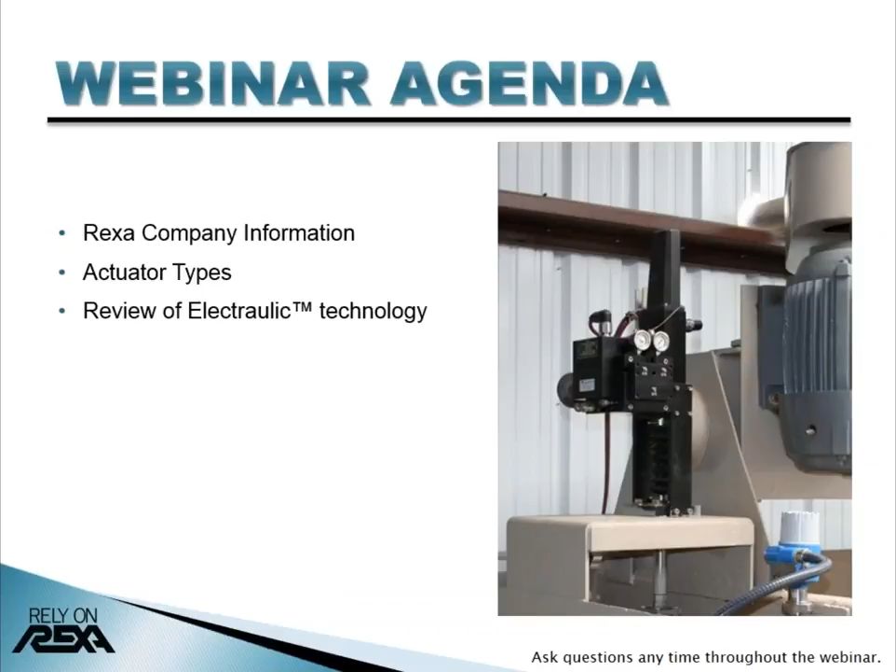As far as the agenda, we're going to talk about Rexa company information to gain a better understanding of Rexa technology. We'll look at the different types of actuation to distinguish from what we do. It was from the need to combine the benefits of each type of actuation technology that Rexa originates and eventually took shape. We'll review the inner workings of the Rexa actuator and what makes it the most unique technology in the market, and we'll look at a focus application, which would be flotation cell dart valve requirements. And we'll look at a pulp level case study of a mine in Arizona, and we'll summarize the advantages and takeaways.

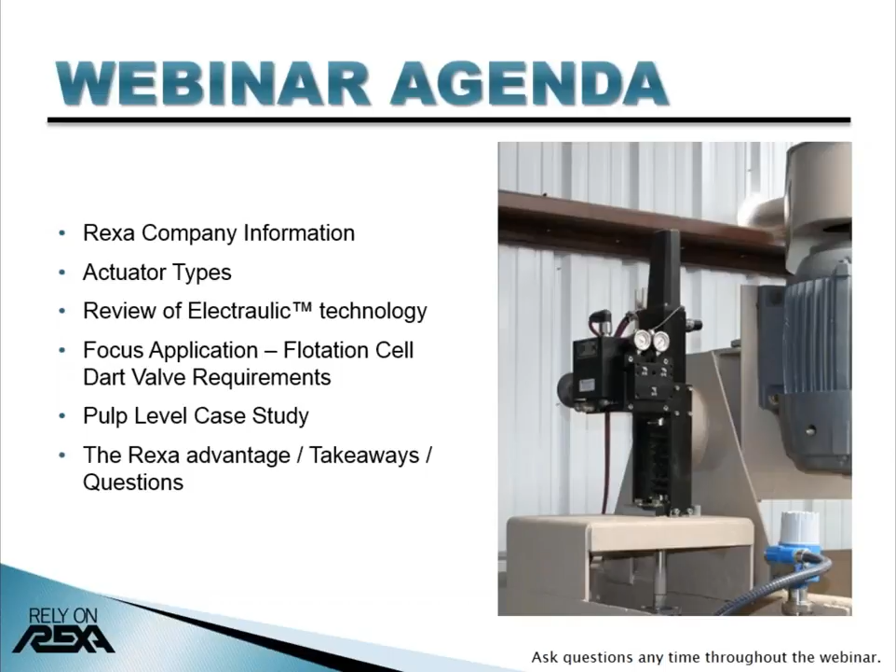The unique actuator patent and concept and company began as a small startup in the early 80s. After trial and error, the first generation model was installed in a few industries in 1993. In 2008, the X2 generation contained key features that built upon the core technology to make it rugged and reliable. Rexa's rapid and consistent growth continues with over 36,000 actuators and drive units sold worldwide. With headquarters near Boston, Massachusetts, and a service and distribution center in Houston, Rexa continues to expand and grow, focusing on key industries such as mining, metals, power, and oil and gas.

Rexa's global install base has thousands of actuators in the mining industry at major miners around the world. At the Morenci copper mine in Arizona alone, there are over 600 Rexa actuators installed.

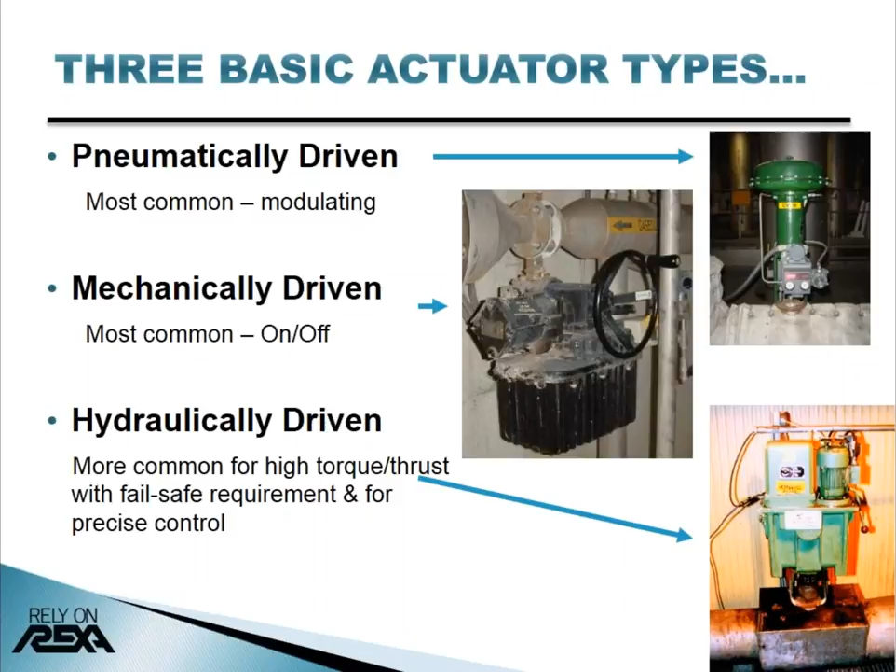There are three types of actuator technologies: pneumatically driven, mechanically driven, and hydraulically driven. Each uses a different method to develop forces and create motion, all with advantages and disadvantages.

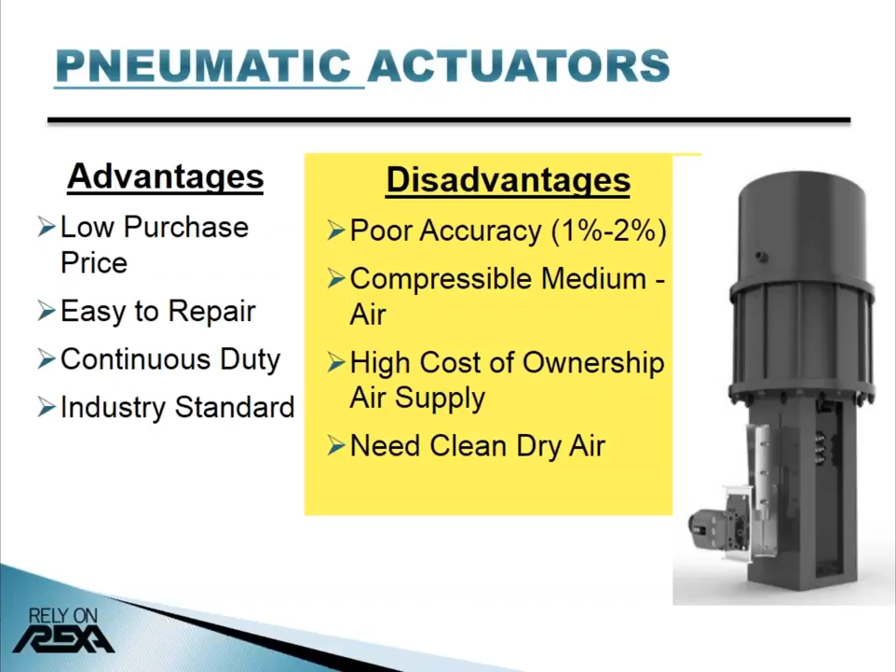First, pneumatic actuators are most common on control valves on new equipment and projects. Their advantages include low purchase price and fast stroking speeds. However, there are limitations with using pneumatics. Because air is a compressible medium, it needs to build up in order to create motion. The results are losses in resolution, overshoot or undershoot, and increased dead time. Even with the use of a smart positioner, the compressibility of air is an inherent problem to achieve rapid and accurate positioning. Operating costs are expensive when you include air compressor energy, dust filters, and water separators. In cold weather, moisture in the air lines may freeze and make the pneumatic actuator non-functional.

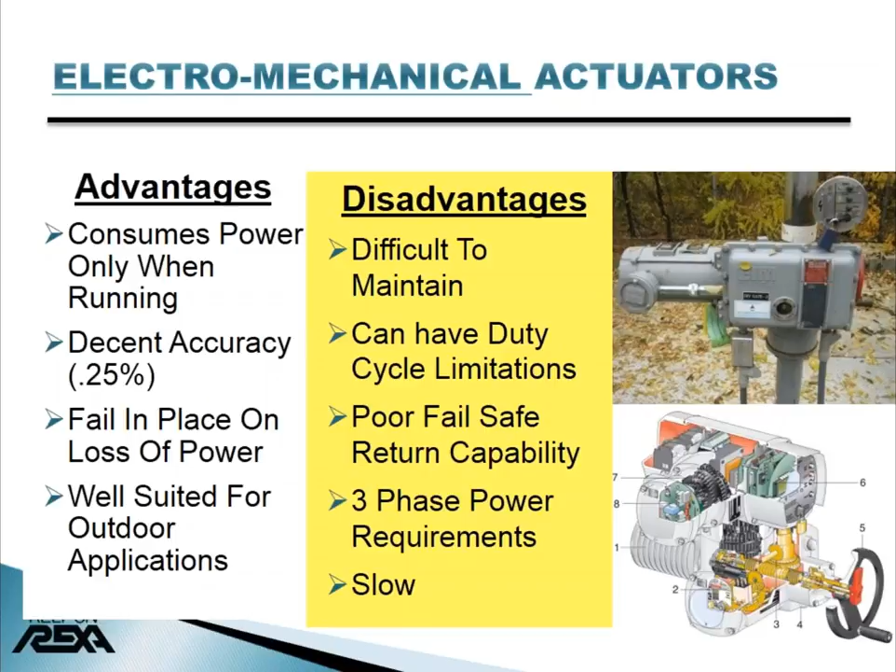Next is electromechanical actuation, most commonly found in on-off type service, which provides tighter control and better frequency response than pneumatic actuators. They're also good in outdoor service. However, most electromechanical actuators have a limited duty cycle, limited force or torque output, and very few fail-safe options available.

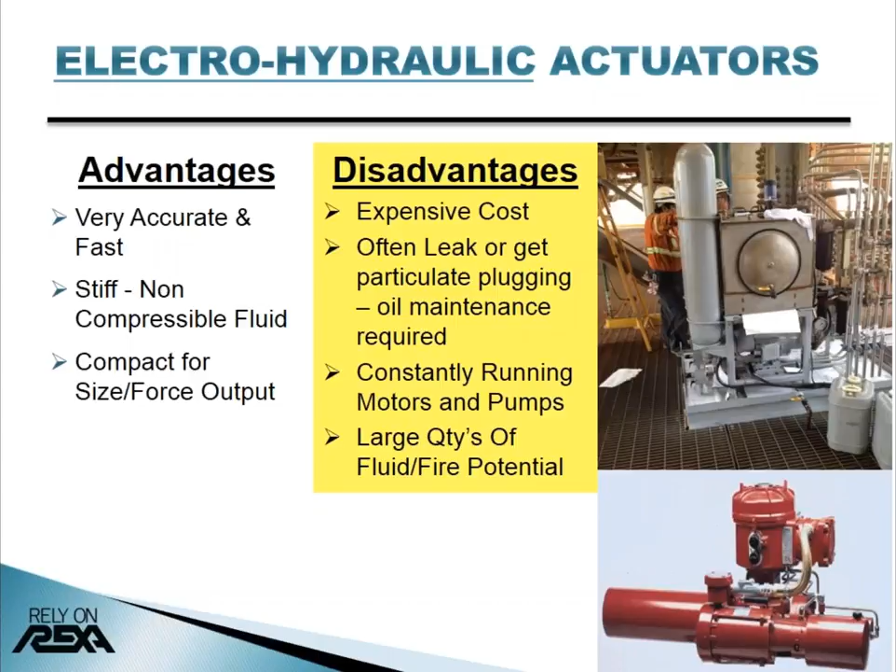The use of electrohydraulic actuators is common for control valves requiring higher thrust and precision. These systems provide fast-acting response, accurate positioning with a high duty cycle. They're also good for high torque applications. These benefits, though, come at a cost. High capital cost, electrical consumption, or oil maintenance costs add up to offset the positioning benefits.

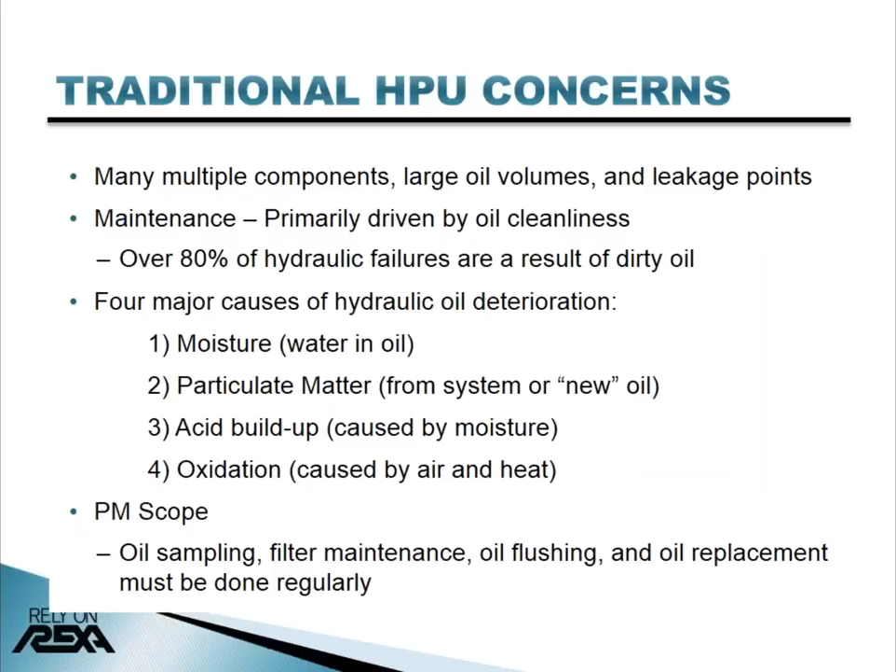HPU units typically have large oil volumes and need routine oil maintenance. Since the hydraulic systems are open-looped, the oil in the reservoir has contact with the environment. Over 80% of hydraulic actuator fails are the result of contaminated oil. Water, oxygen in air, and particulates are examples of foreign matter that degrade the oil quality over time. Many issues with the HPU system can often originate from the breakdown of the hydraulic fluid. Components like servo valves are very sensitive to changes in the hydraulic fluid quality. A complex preventative maintenance schedule is needed to maintain the hydraulic fluid's optimal properties. Oil sampling, filter maintenance, oil flushing, and oil replacement must be done regularly to reduce unscheduled failures.

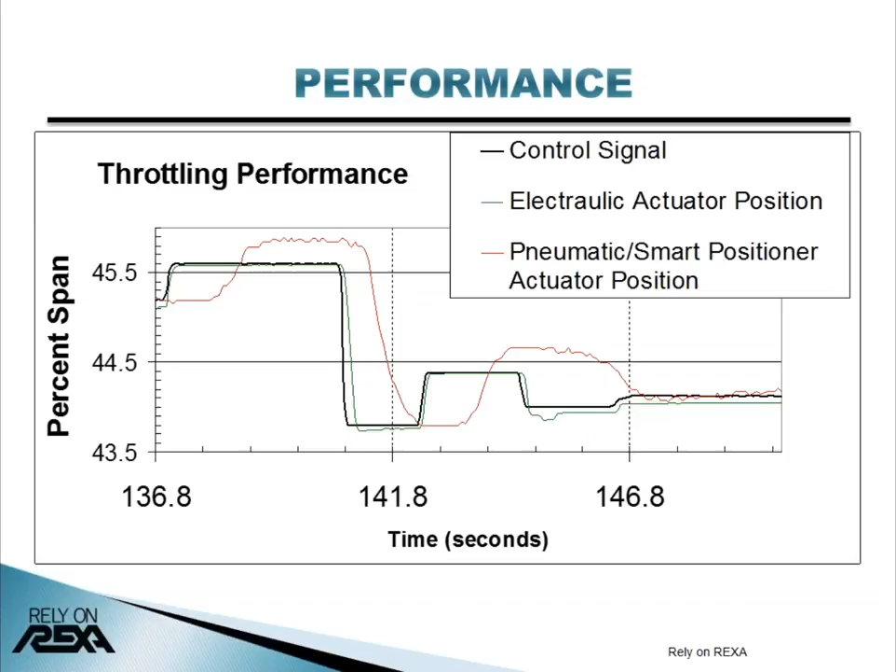With a dead band of 0.1%, which leads to a resolution of 0.1% and a linearity capability of 0.05%, the Rexa X-Pack is the only actuator product line truly capable of matching the potential of modern control systems.

I like to use analogies sometimes. They communicate the message, or sometimes get lost. The control valve is the final control element in many processes, such as making copper or gold. Often the limitation of installed actuators is that they do not take advantage of today's advanced DCS systems.

One analogy I like to use is the need in Formula One racing to push technology and performance between the powertrain, which includes the engine and transmission, and the racing tire design and compound formulation. As an example, in 2005, at the F1 race in Indianapolis, some tires were failing during the qualifying laps on turn 13. So the tire manufacturer suggested having the race car slow down for that turn to keep the driver safe, but this reduced lap times.

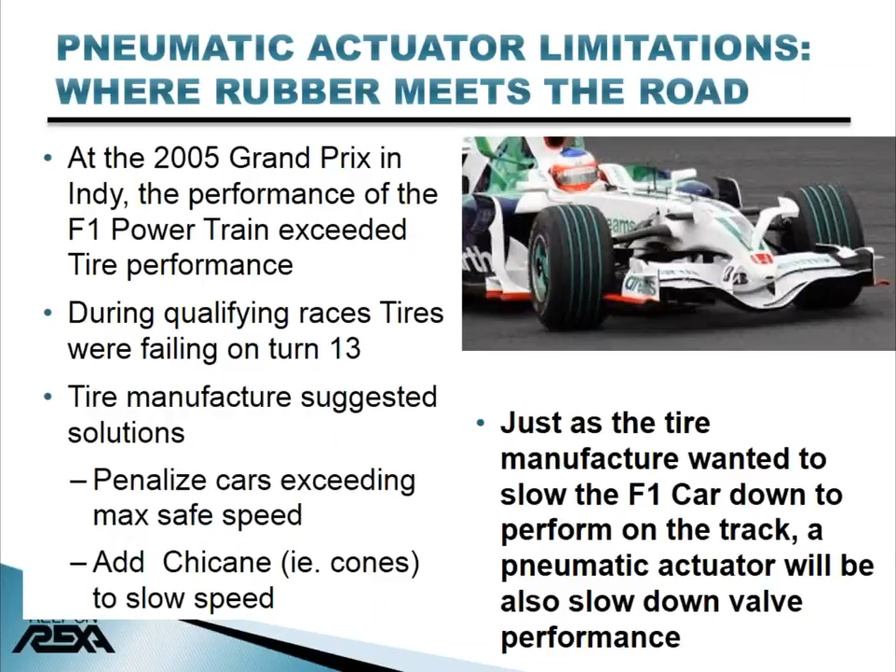For a valve actuator assembly controlling liquid flow, we do not need to be limited or slowed down by a pneumatic actuator. With Rexa, the electrohydraulic performance enables the power of the DCS to be realized.

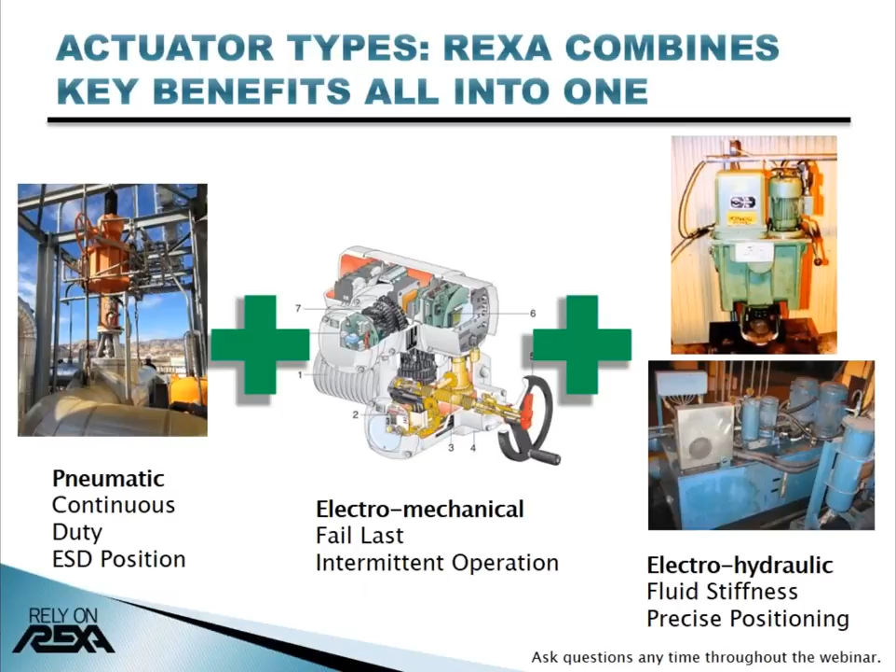Rexa combines the benefits and capabilities of each of the actuator technologies into one: simplicity, fail-last position and high duty cycle of pneumatics; intermittent operation of electromechanical; and positioning accuracy and fast actuation speeds of hydraulics.

Let's talk about some of the benefits of the hydraulic actuator of Rexa. To begin with, it's a very unique design, unlike anything on the market today. The true closed-loop hydraulic system is hermetically sealed with oil volumes approximately 95% less than those found in a standard HPU. Smaller Rexa units have as little as 500 milliliters of oil, which is about one can of Coca-Cola soda.

There are no filters or oil changes required, making it maintenance friendly. All models can operate at 100% duty cycle if needed through the use of a brushless DC motor or servo motor. These units are high precision and repeatable to 0.1% span. Our modular design allows very high thrust and torque output with a high-speed fail-safe option.

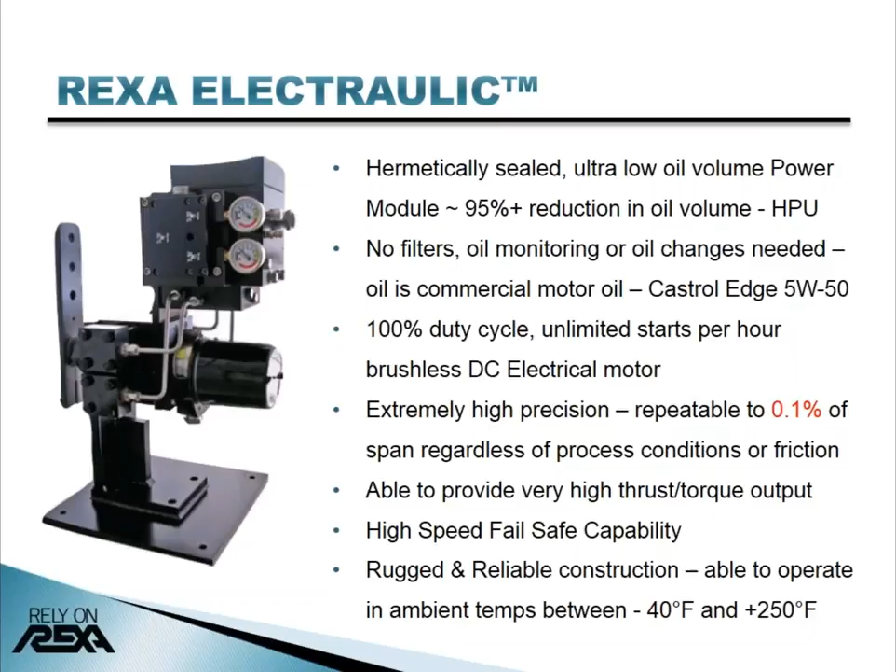Operating temperature range is -40 to 250 Fahrenheit without performance degradation. Having Rexa actuators installed at major steel mines in the world, Rexa actuators are unmatched when it comes to being rugged and reliable.

The Electraulic technology consists of two primary components: the mechanical subassembly and the electrical subassembly. The mechanical portion is attached to the driven device, which in this case would be a dart valve. It contains a motor, pump, flow match valve assembly, cylinder, and feedback housing.

The electrical subassembly is basically the positioner of the actuator. This is where the main power supply and control signal are routed, and the origination of 4 to 20 milliamp position feedback for connection to the DCS or other control system. Digital communications such as HART or Foundation Fieldbus are also available.

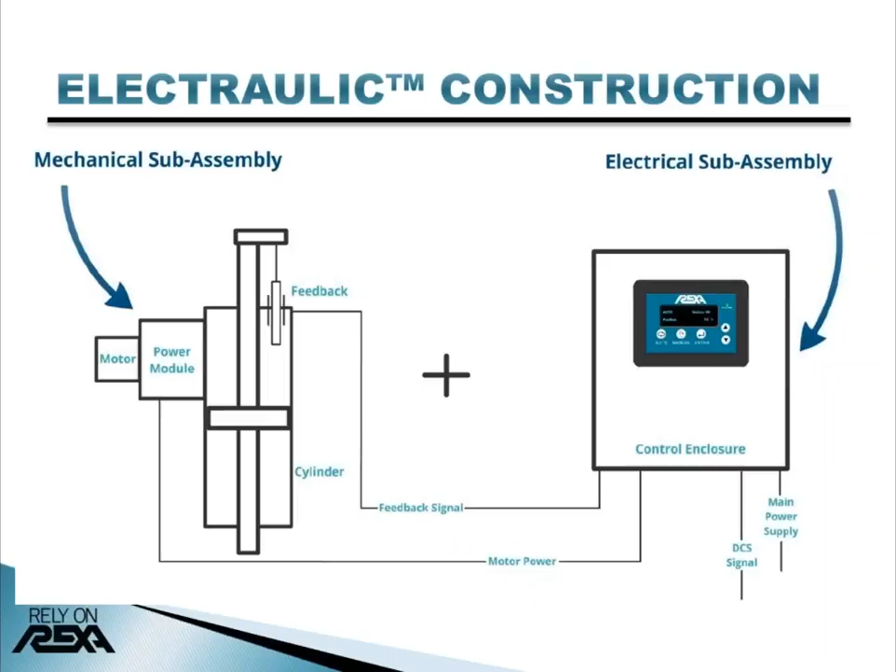We separate the electric and mechanical sub-assemblies for ease of access and operation. There are many severe applications, for example close to furnaces, where onboard electronics simply would not survive. The control box can be mounted in a convenient location next to the valve, or up to 700 feet away.

Let's next take a look at the hydraulic circuit that Rexa has. This is a real area of differentiation of our technology in comparison to HPU-based electrohydraulic systems. The centerpiece of the electrohydraulic circuit is our bidirectional gear pump, which is coupled to the DC brushless motor.

The gear pump works in conjunction with the flow match valves, which are designated FMV1 and FMV2 on the schematic. It is important to note, from a size perspective, the flow match valve and gear pump can be held in the palm of your hand.

During operation, when the actuator is at a desired position, the spring-loaded ball checks are locked in place to prevent the flow of oil through the flow match valves. The cylinder is hydraulically locked in place, so forces acting on the valve will not result in valve movement, which is observed in pneumatic actuators.

But when there is a signal change, the motor activates, turning the bidirectional gear pump, which instantaneously builds pressure, allowing the ball checks to open. The oil is then transferred through the flow match valve, one side of the cylinder to the other. Once the actuator has reached its desired set point, the motor stops, the ball checks are seated, stopping the flow of oil through the system.

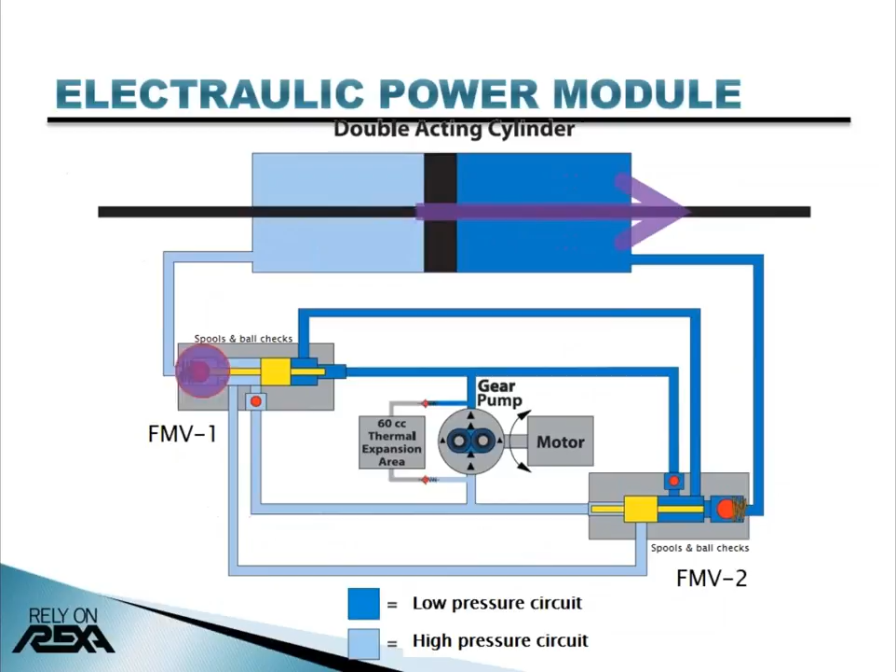The cylinders we use are dual rod or rack and pinion, so the oil volume exiting one side of the cylinder is equal to the volume entering the other side. The design eliminates both the requirement for an external reservoir and the need for continuously circulating oil through the system. This also leads to another significant benefit of our technology: greatly reduced oil volumes.

A thin film potentiometer is directly coupled to the cylinder shaft. The cylinder seals are rated for 2 million full strokes or 20 million dither cycles.

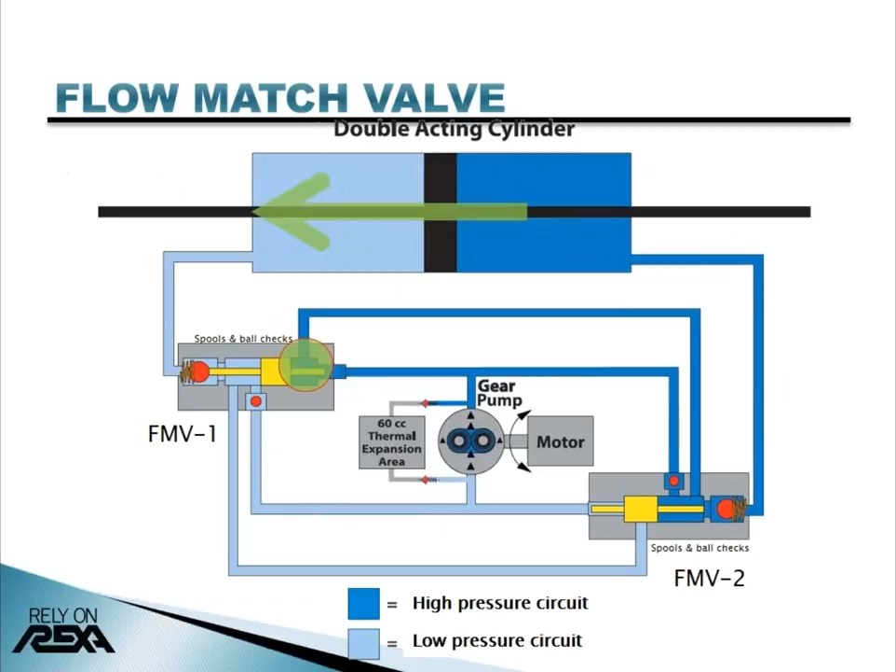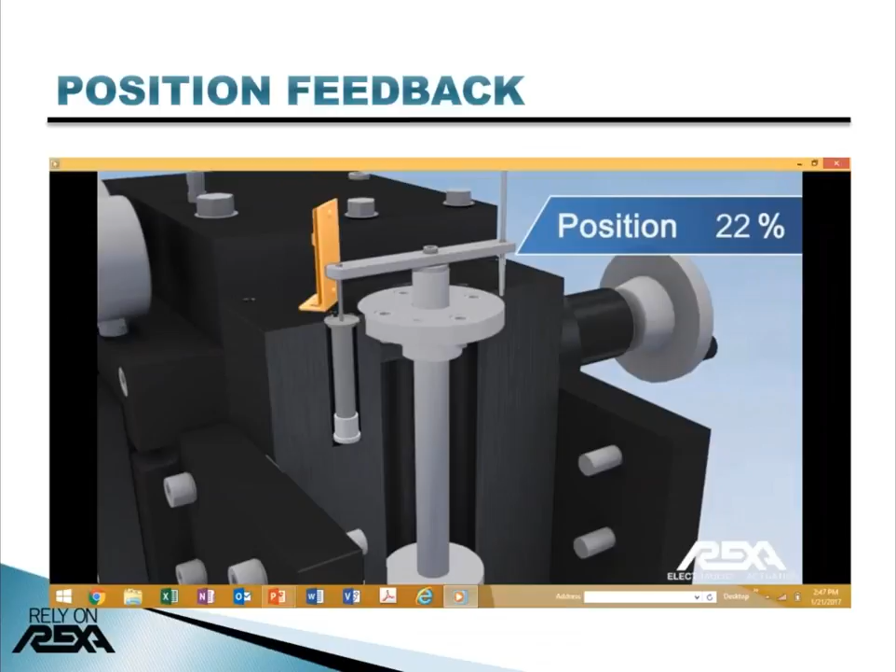Let's look now at how Rexa actuators can be used in flotation cells. Froth flotation is a process for separating minerals from gangue by taking advantage of differences in their hydrophobicity. This difference between valuable minerals and waste gangue is increased through the use of surfactants and wetting agents. Selective separation of minerals makes processing mixed ores economically feasible.

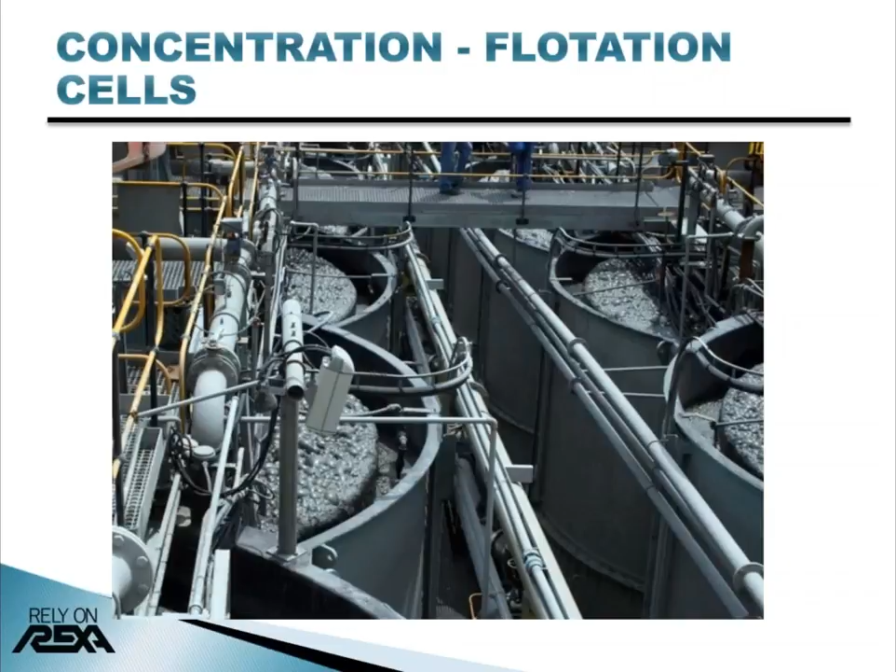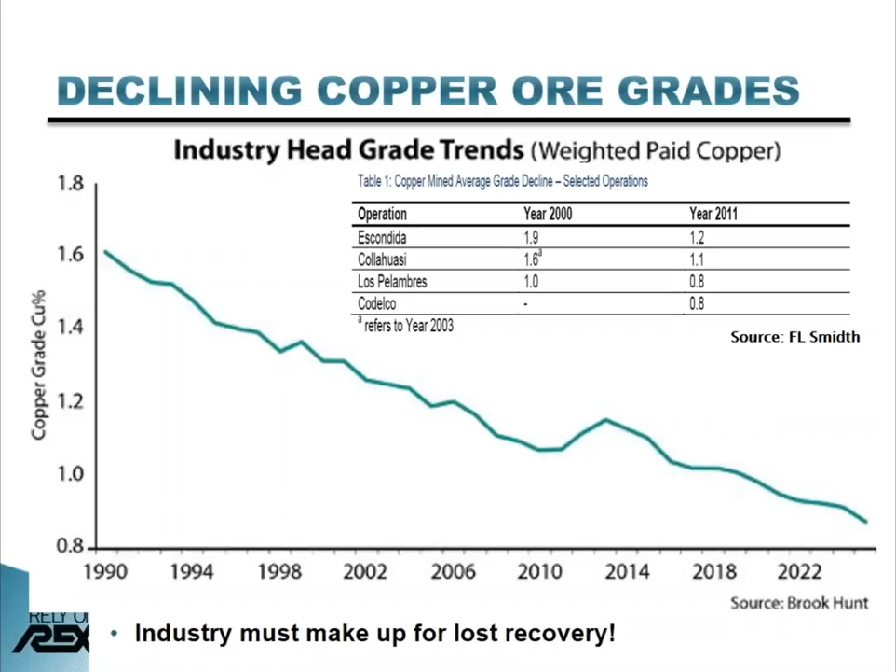The flotation process is used for the separation of a large range of sulfides prior to further refinement. Phosphates and coal are also purified by flotation technology. Copper, gold, moly, and platinum are examples of minerals often processed using flotation.

Two modulating valve applications are dart valve positioning and airflow control. The focus of this webinar will be dart valve positioning to maintain pulp level set point. Achieving a level pulp will allow the froth layer to be more consistent.

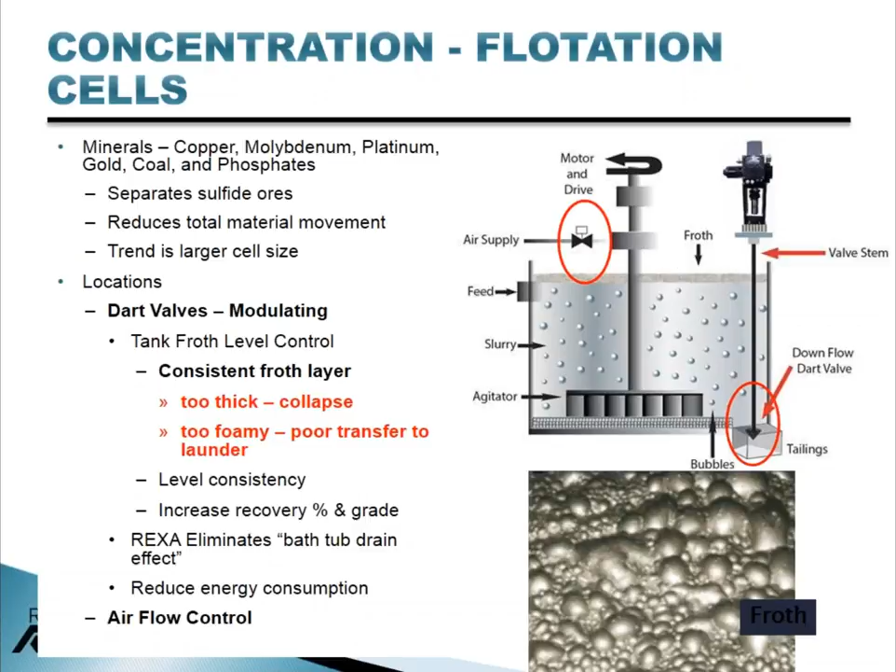To achieve a stable froth level, the actuator should be able to perform flawlessly in the following areas: actuate at a high duty cycle without stalling, be reliable without causing unscheduled downtime, be able to position rapidly and accurately to control signal changes, and depending on how the plant operates, be able to fail in place or fail closed.

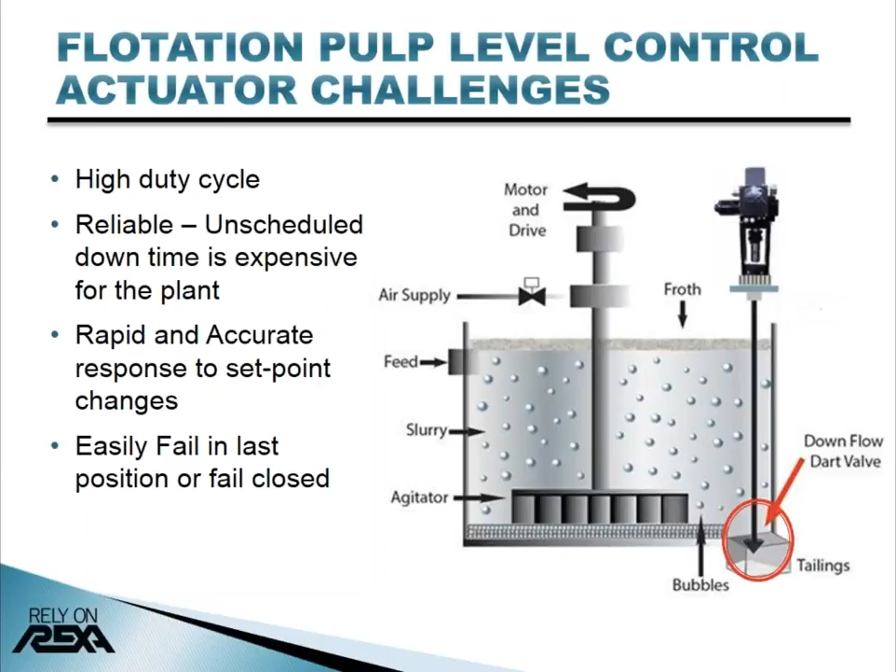When the dart valve position is near the valve seat, the pulp velocity increases, creating a lower pressure. This force will pull the dart valve toward the valve seat. As cell volumes increase to as big as 600 cubic meters, higher thrust forces and fast stroke speeds are needed.

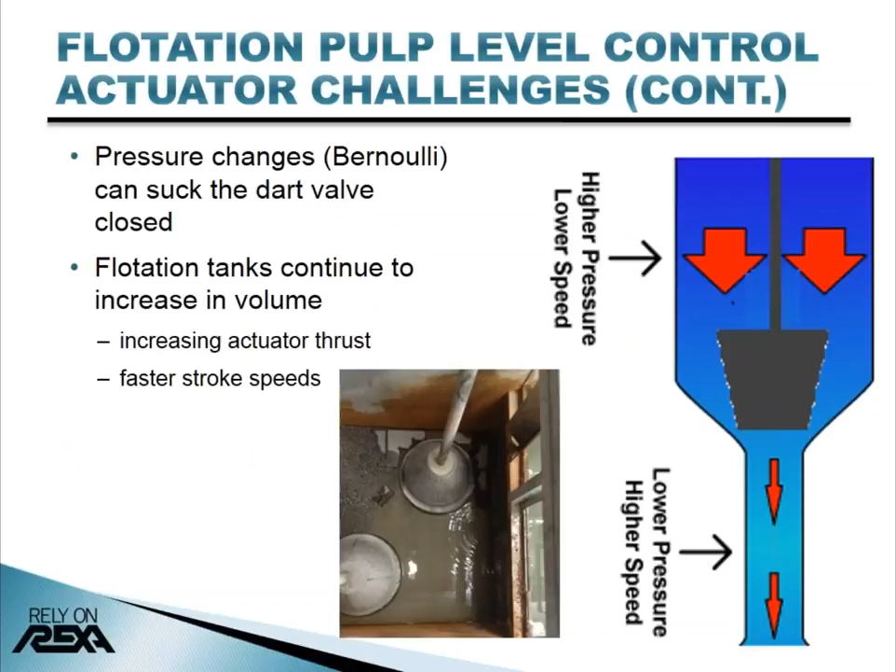Grade recovery curves are useful tools in weighing the trade-off of producing a high grade of concentrate while maintaining as high a recovery rate as possible — two important aspects of froth flotation. These curves are developed empirically based on the individual froth flotation process at a particular plant. The curves are shifted in the positive-right and positive-upward direction, and by doing this, the performance of the froth flotation process is regarded as improving.

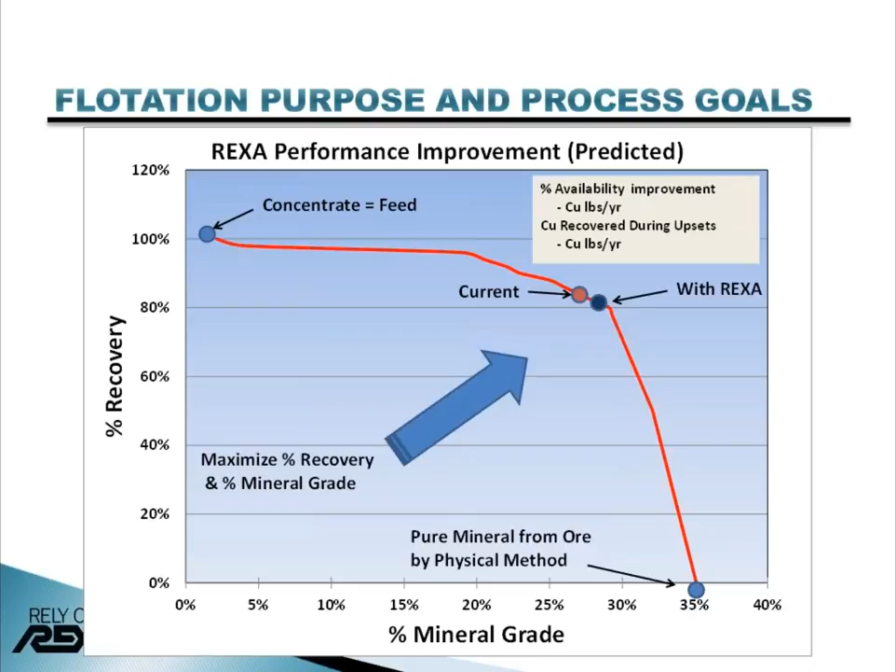The theoretical limits are percent recovery and percent mineral grade. With 100% recovery, the ore is recovered with little benefit of concentrating the ore — the analogy is throwing the baby out with the bathwater. The other limit is to achieve high mineral grade with infinite time to achieve the separation, but the real world is not a test lab with infinite time.

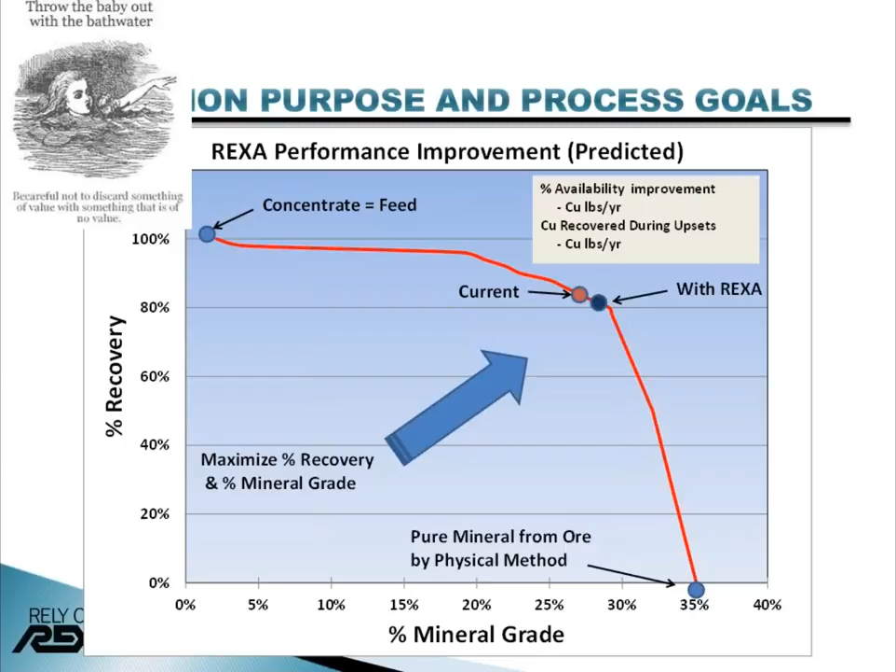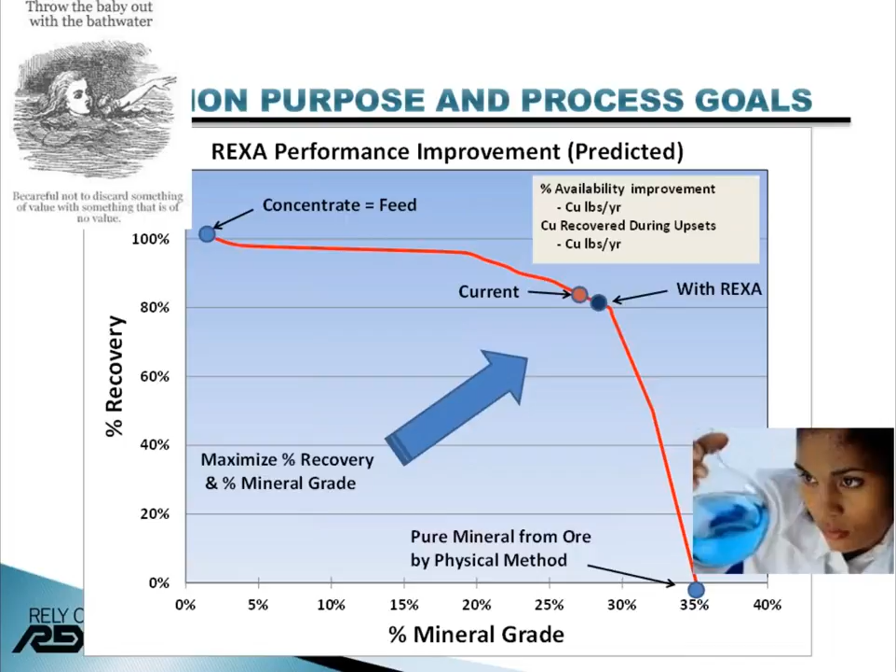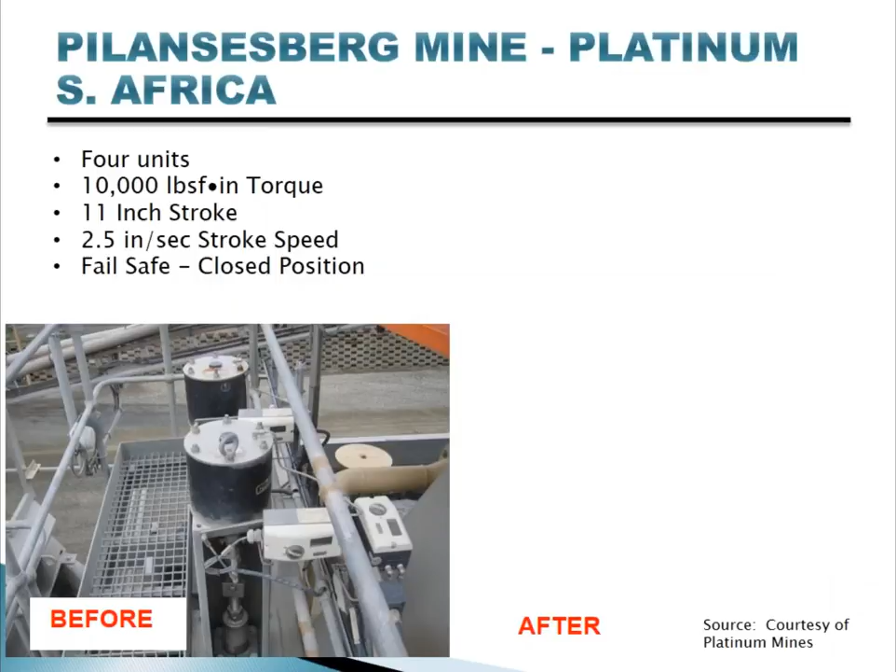At the Pilansesberg mine in South Africa, Rexa actuators successfully replaced pneumatic actuators. We also have an accumulator skid to provide fail-safe. Accumulator fail-closed positioning replaces the spring with a reservoir and piston-type accumulator placed in parallel with the cylinder. This eliminates the need to oversize the cylinder to make up for the force required to compress the spring. The accumulator is isolated from the main hydraulic circuit during normal operation.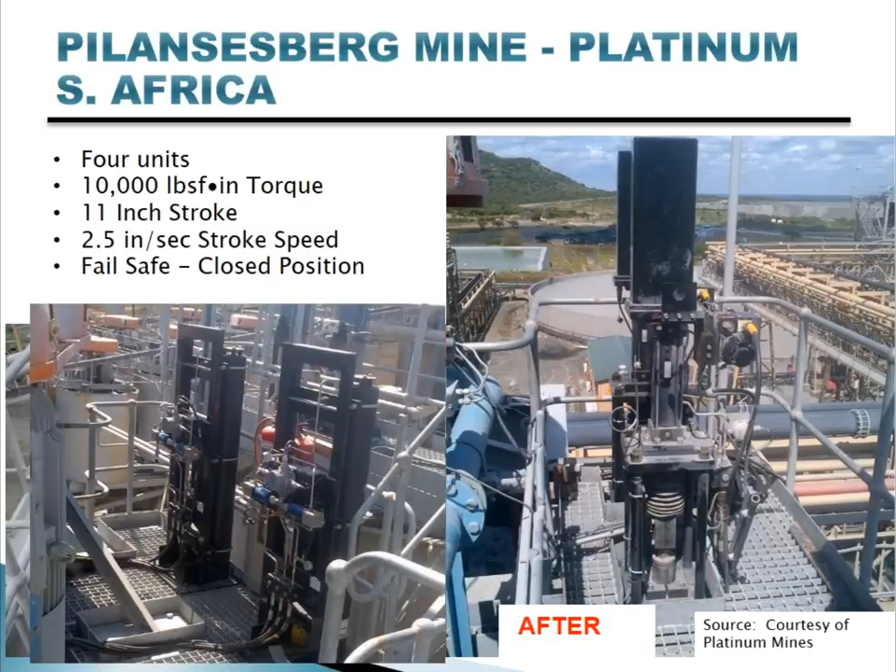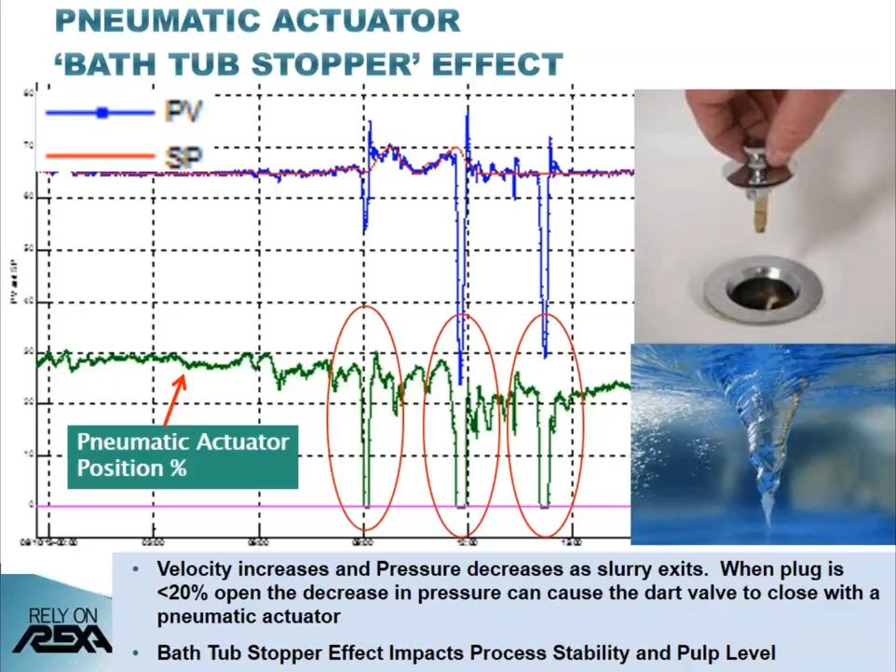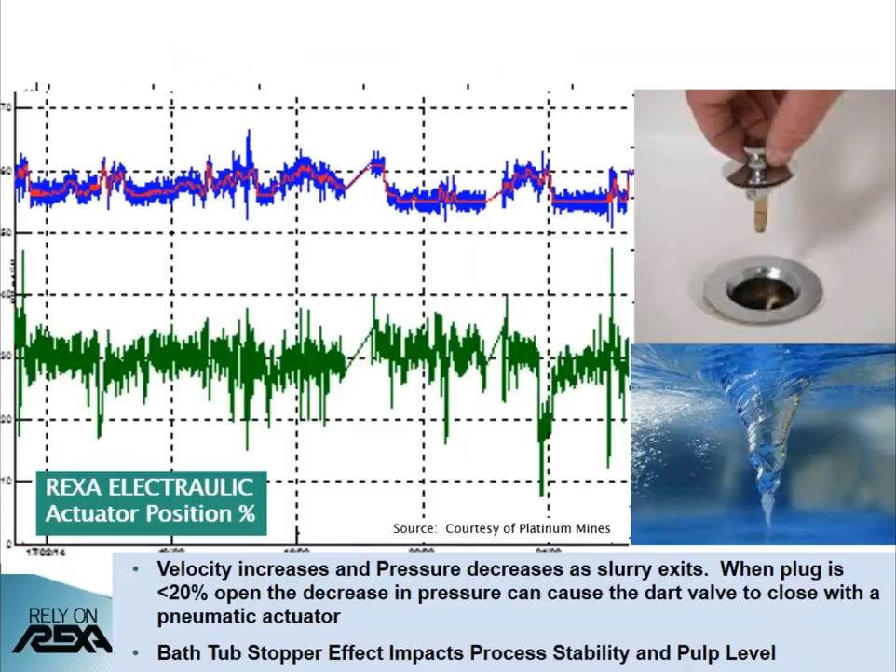After retrofitting with Rexa actuators, because of the stiffness of hydraulics, the valve position never closes. In this situation, the actuator control strategy for the 2 actuators was split range. The process variable variation, which was the flow rate, was reduced with Rexa by 43%.

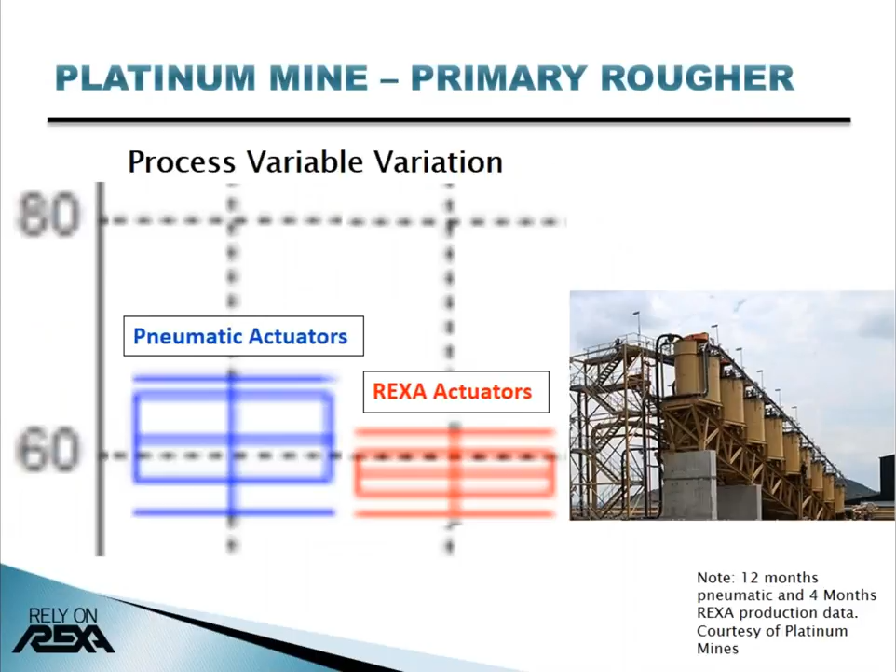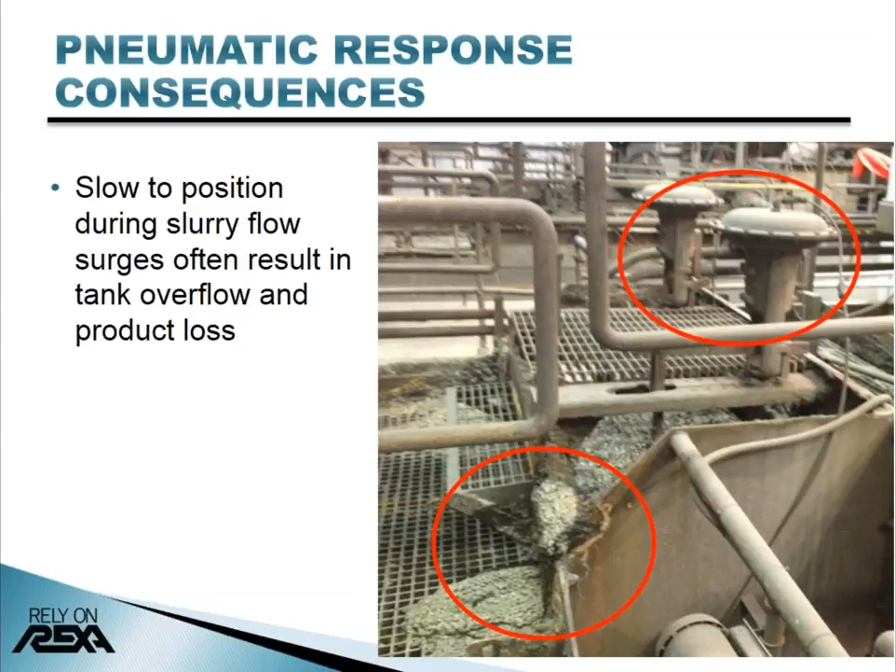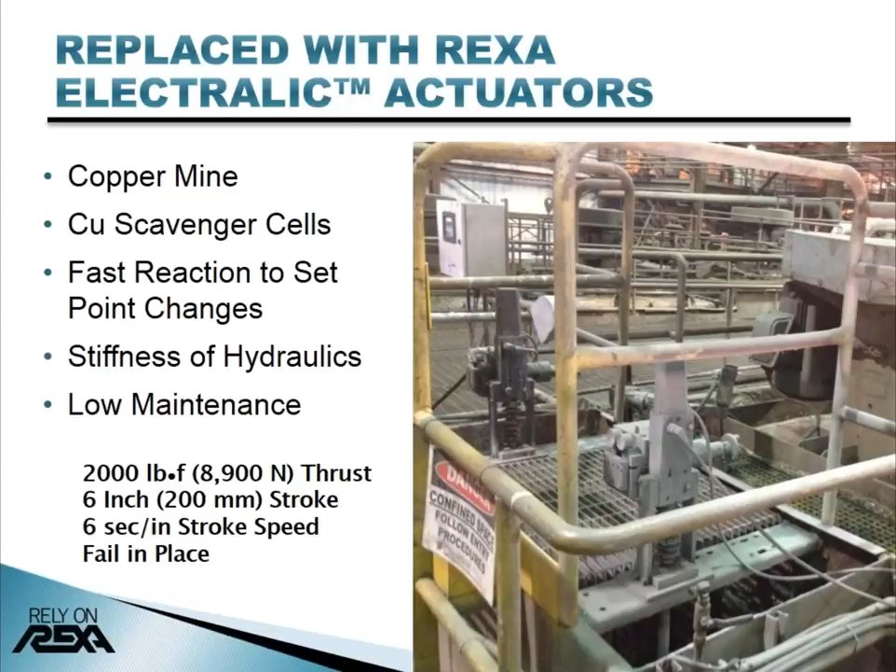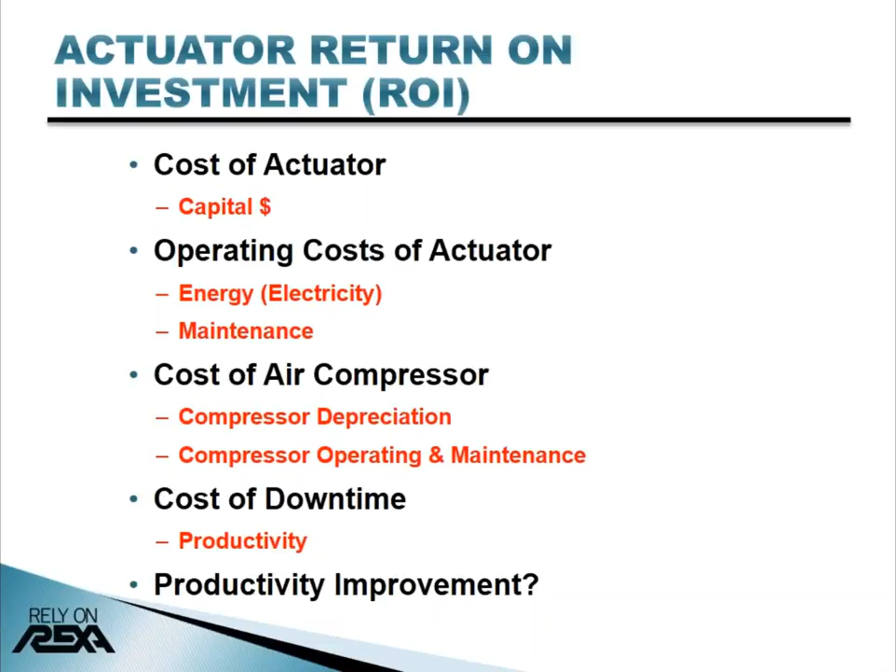In this case study, the rougher flotation step is followed by the scavenger flotation step, which is applied to the rougher tailings. The objective is to recover any of the copper mineral that was not recovered during the roughing stage. Copper contained in the pulp leaving at the bottom of the scavenger cell goes to tailings and is not recovered in the current process.

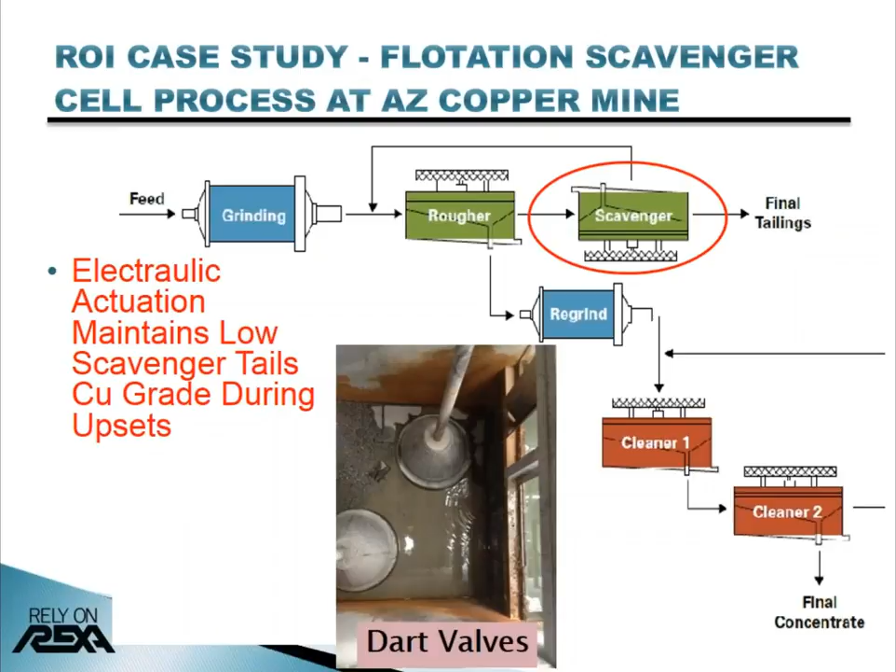When the end user south of Tucson, Arizona compared the performance of Rexa versus pneumatic actuators, the results were clear. During steady state operation, the copper grade going to the tailings was about 0.15% copper for both types of actuation. But during slurry fluctuations, the Rexa continued to maintain 0.15% copper.

The pneumatic actuators were about 25% higher in copper going to the tailings. The cost to the mine, with about 43 minutes of disruption time per day, is estimated to be about 33,000 pounds of copper that is lost to the tailings due to the pressure fluctuations and the pneumatic actuator not being able to control it.

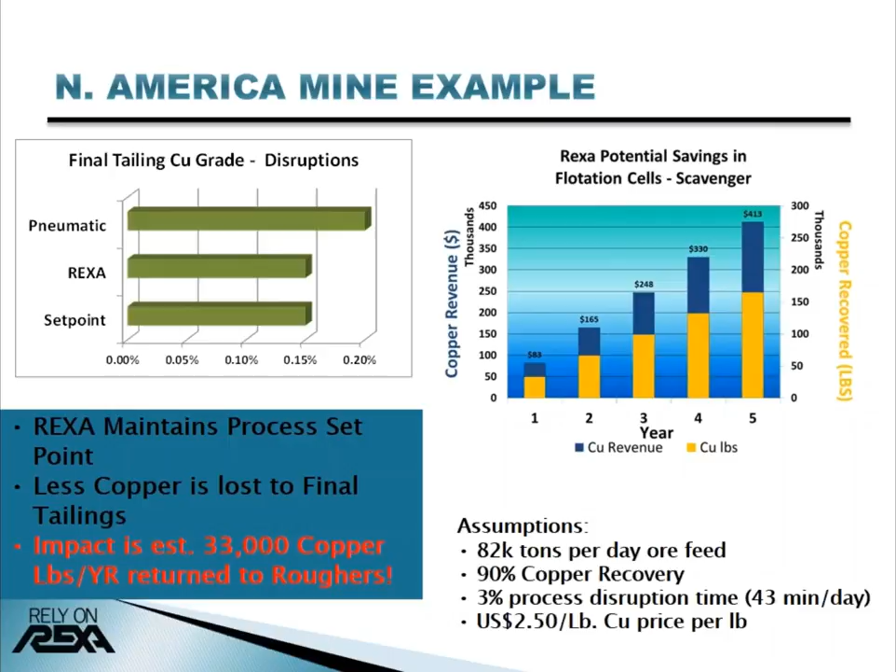So let's look at operating costs. A single Rexa actuator will operate at under $500 per year versus $7,000 per year for pneumatics. I used the energy consumption costs from the Department of Energy website for my assumptions. The electricity is a significant contributor, as well as compressor maintenance.

Replacement dust filters and airline cleaning also contribute to the maintenance component. The Rexa electrical consumption is very low: 70 watts for the electrical cabinet, 120 watts for an intermittent heater, and 800 watts for the motor operated intermittently.

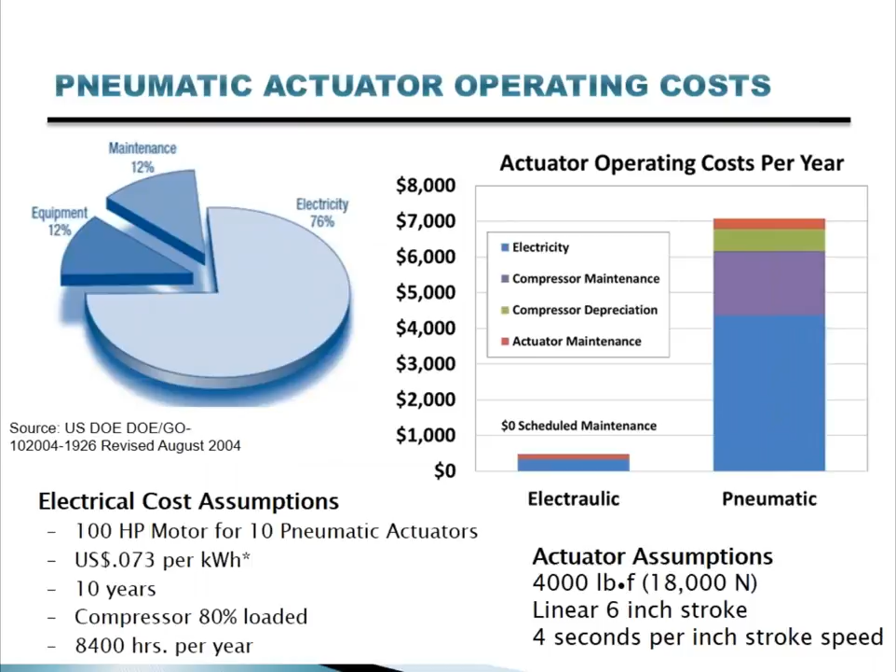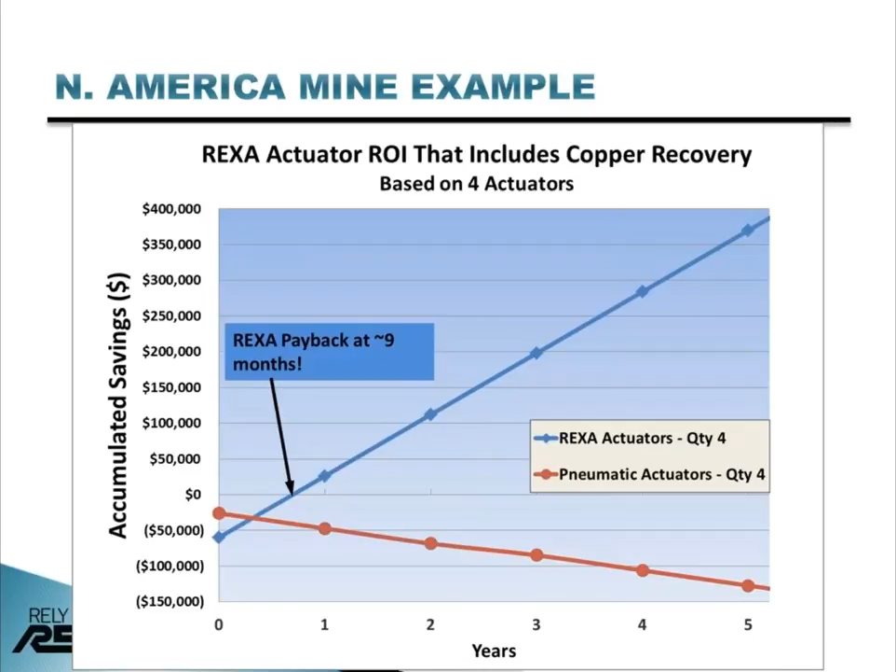This chart shows the annual trend of cost savings using Rexa versus pneumatics. It is comparing 4 units each. The payback from the copper recovery and operating costs is about 9 months. Since sometimes it is difficult to prove recovery savings, this chart includes only the operating costs of the 4 actuators. The payback when only calculating operating costs such as electricity and maintenance is 1.75 years.

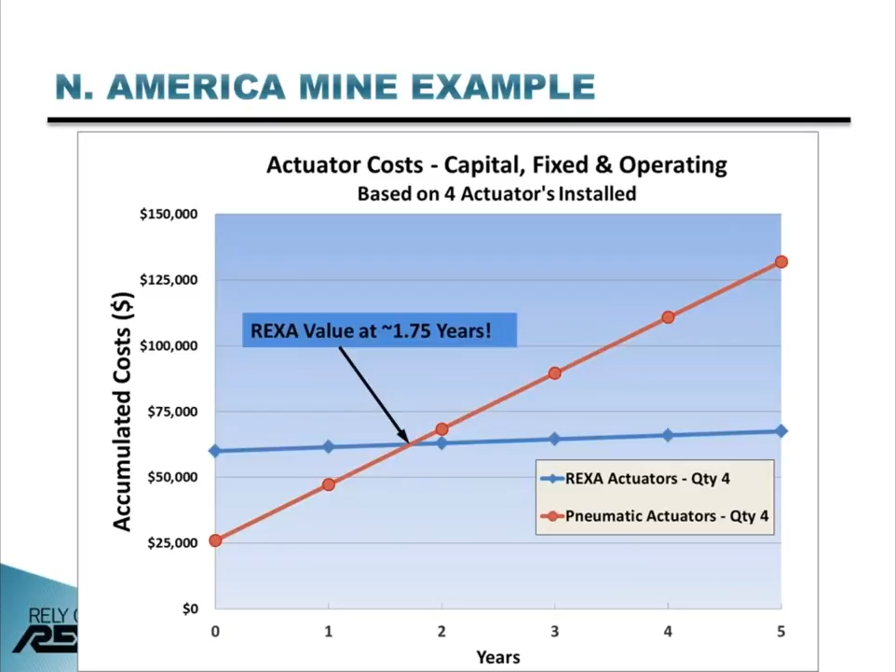4 pneumatic actuators will consume nearly $60,000 in 3.4 years in electricity costs alone, assuming 7.3 cents per kilowatt hour energy cost. This is roughly equal to the amount of electricity that costs to operate Dallas Cowboys Stadium for a football game on Sundays. 4 Rexa actuators would consume less than $4,500 in the same 3.4-year duration. The cost of electricity is significant. For some remote mines, the cost of electricity could be as high as 20 cents per kilowatt hour.

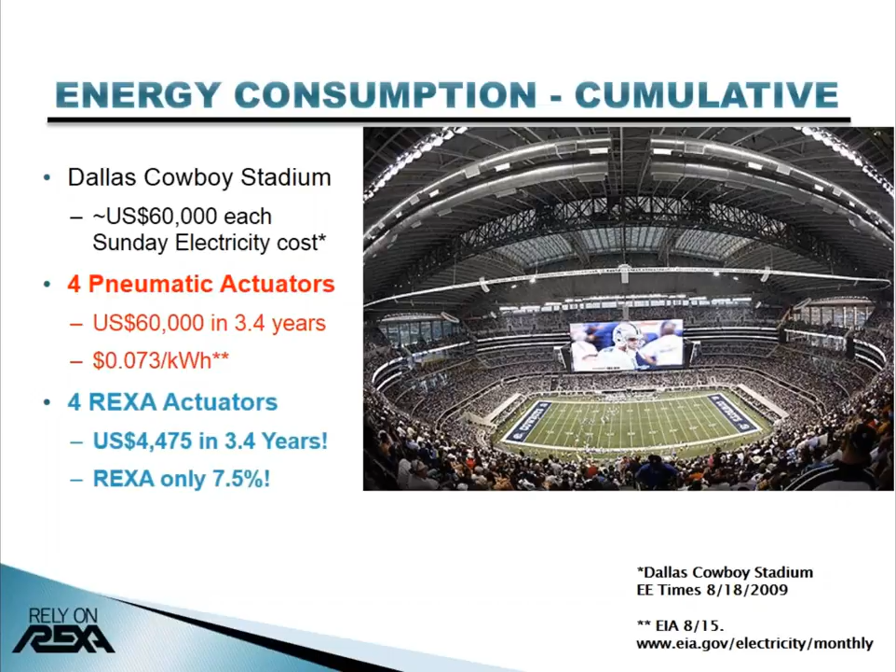This is a couple of other installations that I'm going to go through. This is at the Goldcorp Penasquito Gold Mine in Mexico. The Rexa actuators were engineered to satisfy a specific miner requirement. Instead of seating the dart valve by calibrated position, pressure transducers in the cylinder are used.

The actuator strokes until calibrated delta pressure is reached and the motor is turned off. A relay tells the DCS the actuator has reached full closed pressure. The actuator adjusts for plug erosion as compared to using a calibrated position. The benefit to the miner is the maintenance interval is extended.

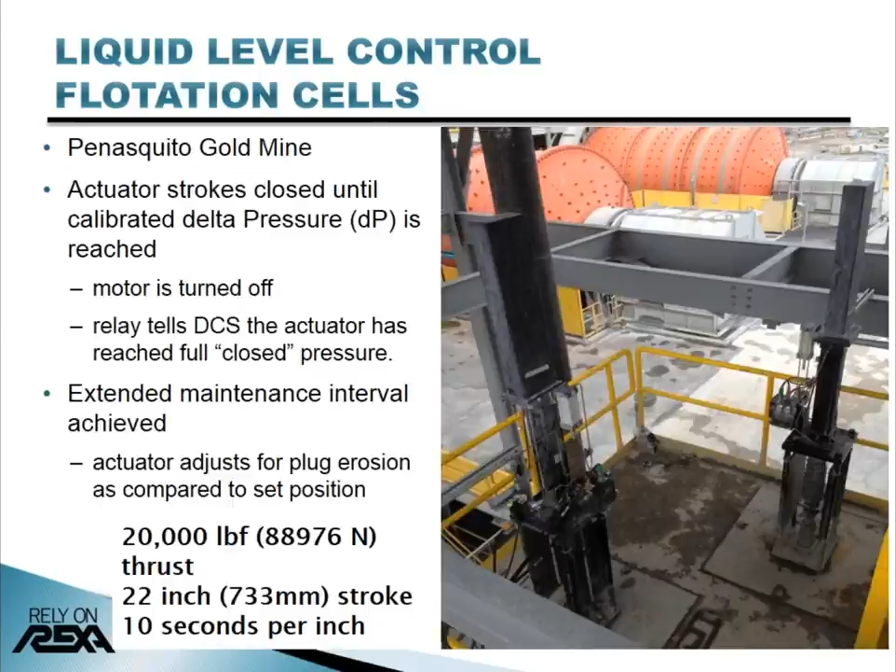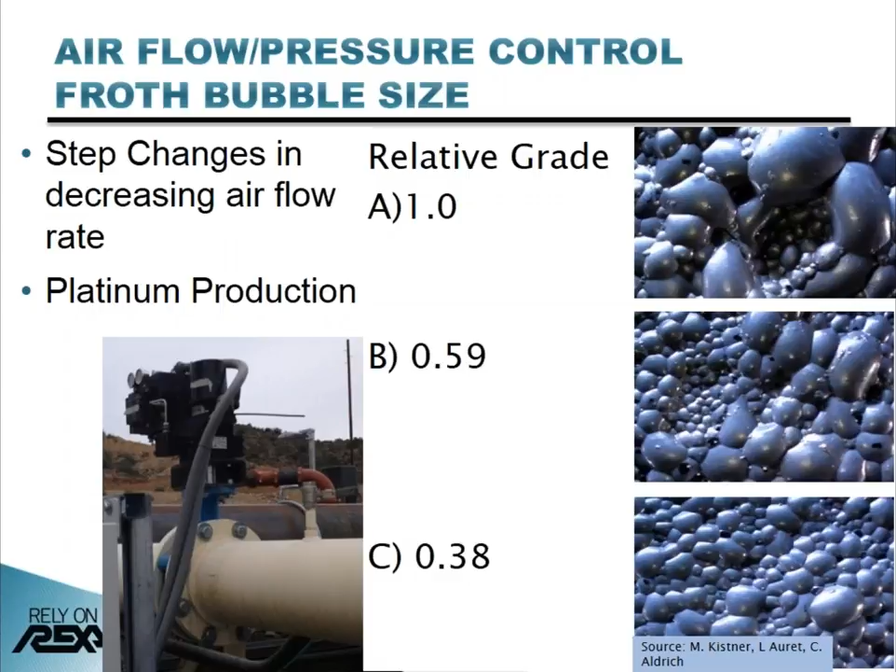This is an installation at our Bagdad copper mine in Arizona. Each actuator has a low torque of 2,500 pound-force inches, and we have 12 units in their copper flotation area.

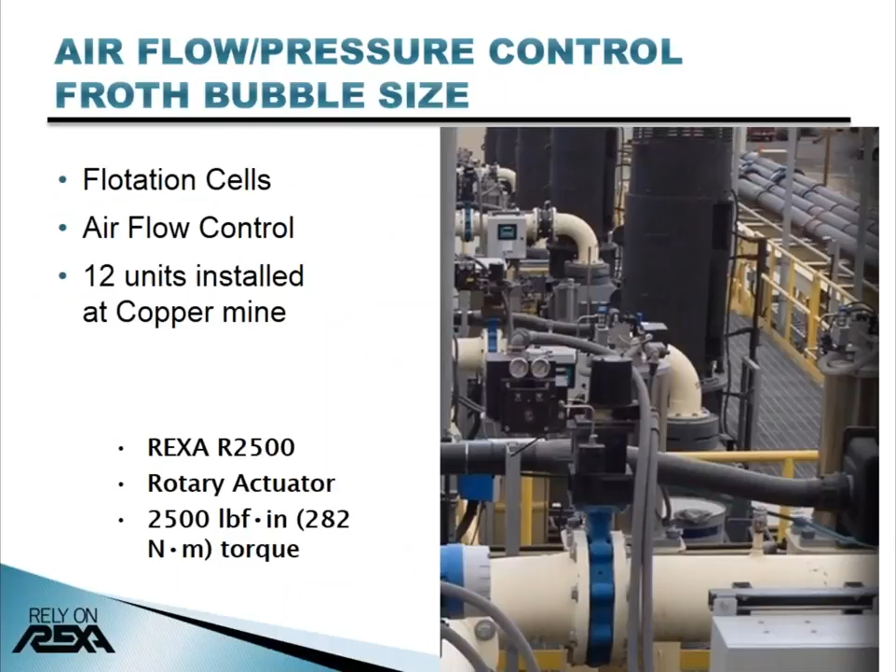And this is another installation of airflow control. This is at the Robinson Copper Mine in Nevada.

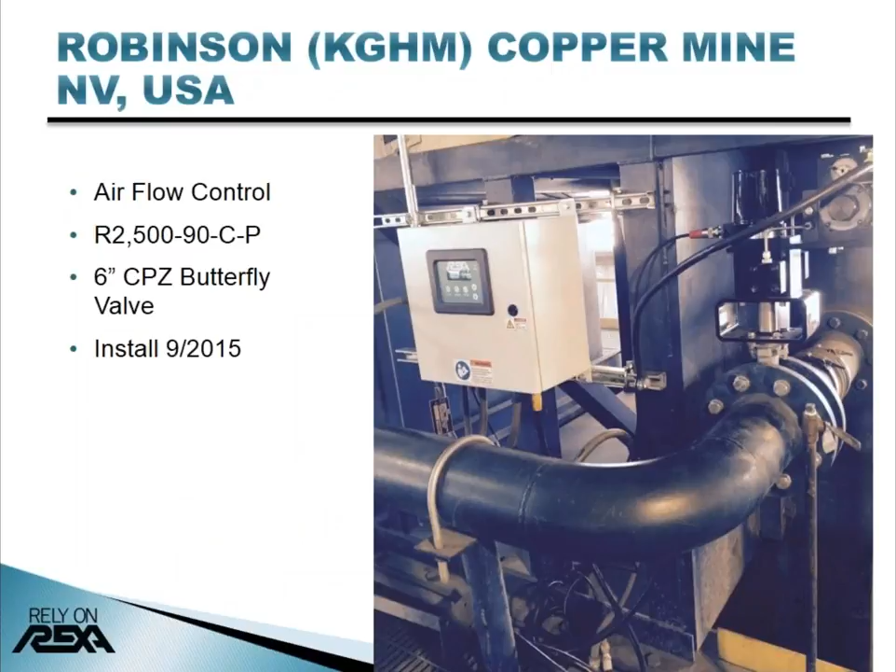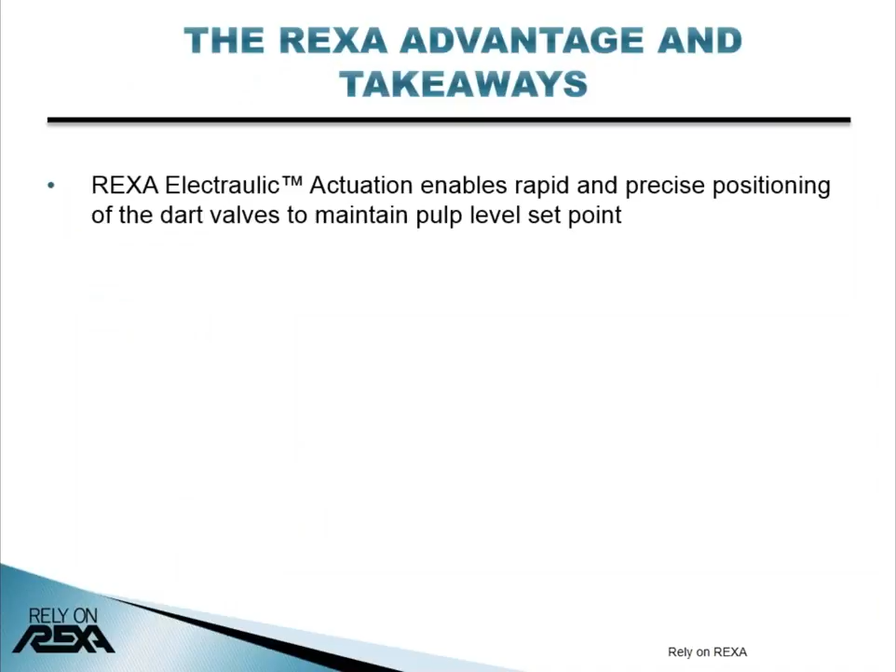So let's talk about the takeaways. The Rexa has a rapid and precise response of the actuator to position dart valves to keep the pulp level at set point. Hydraulic stiffness allows for positioning close to the valve seat without suction forces to cause the dart to move and close.

About 7-year maintenance intervals are expected as the cylinder should perform to 2 million full strokes and 20 million dither cycles. Due to the fact that the hermetically sealed and pressurized hydraulic circuit is not exposed to the environment causing contamination, the oil never has to be cleaned or changed. With the minimal number of seals and few moving parts, the units are field proven in harsh weather and dusty environments, and much less energy consumption as compared to pneumatics when you consider compressor operation.

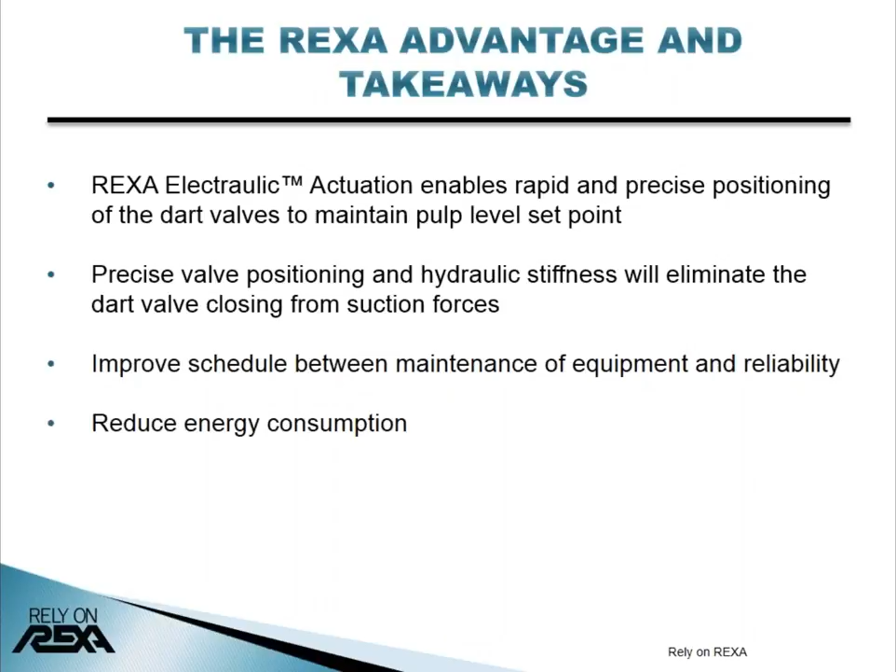A Rexa actuator is not a product but a solution that will make the difference for your plant in critical applications such as pulp level control and flotation cells. It's a proven engineering design and an investment that will continue to carry forward.